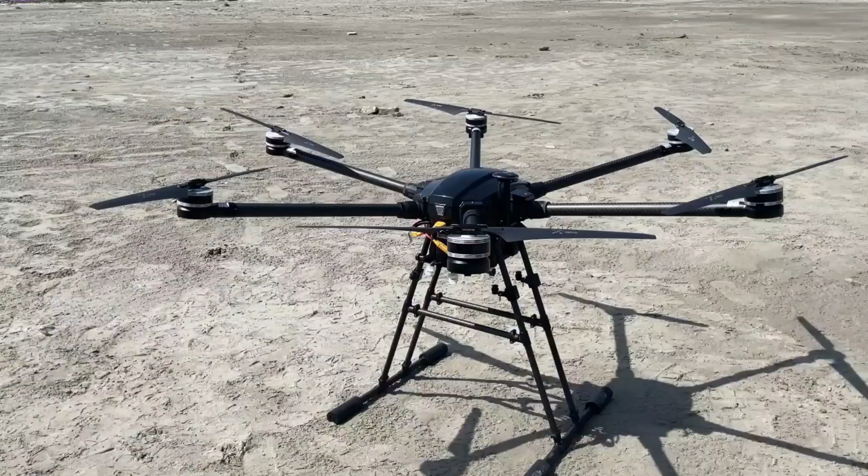Altair is the proposed unmanned aerial vehicle for the 2023 SUAS competition, designed to carry payloads and travel long distances to aid in challenge missions. It can be utilized for a wide range of applications such as aerial mapping, surveying, and rescue missions, as it is equipped with advanced sensors, imaging, and navigation systems.

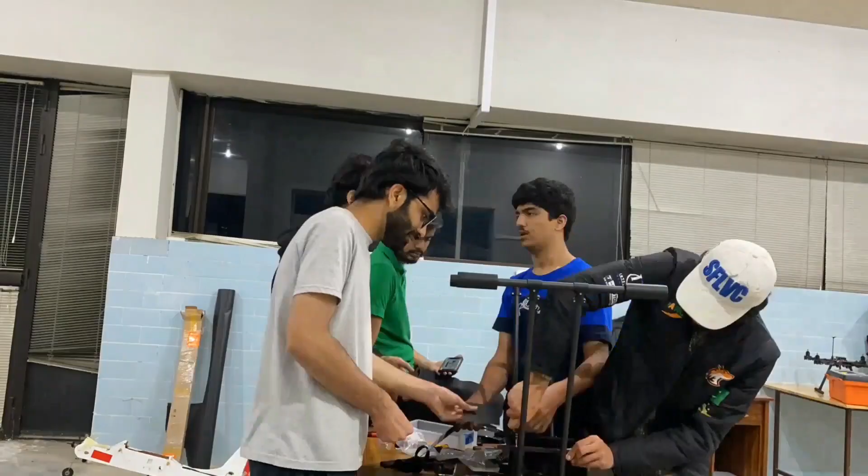The team consists of students from various engineering disciplines and is divided into four main streams: design, product development, software development, and multimedia, who work passionately to unveil the possibilities in aviation every day.

Our competition team includes Muhammad Ali Khwaja, team manager and director of automation, also the safety pilot and point of contact, with 4 years of experience. Waliullah Khan, director of design and test pilot, as well as GCS operator and backup safety pilot, with 4 years of experience.

Umar Arif, product and systems development lead and multimedia lead, 4 years of experience. Zain Mahmood, director of testing and documentation and competition safety and operations lead, 4 years of experience. Hashim Shabir, product development head and competition's electrical systems lead, 3 years of experience.

Moiz Taha, director of finance and design head, as well as GCS operator and electrical systems lead, 3 years of experience. Muhammad Ahmed Adil Khan, design and automation lead and mechanical systems lead, 3 years of experience. Muhammad Danish Javed, digital graphics lead and electrical systems head, as well as multimedia and avionics lead, 3 years of experience.

Abdur Rafe Amir, automation systems head and product assembly lead, 2 years of experience. Abdul Wase, product development head and electrical systems and product assembly lead, 2 years of experience. Muhammad Saad Farooq, mechanical systems lead and avionics lead, 2 years of experience. Umar Irfan, automation head and avionics lead, 2 years of experience.

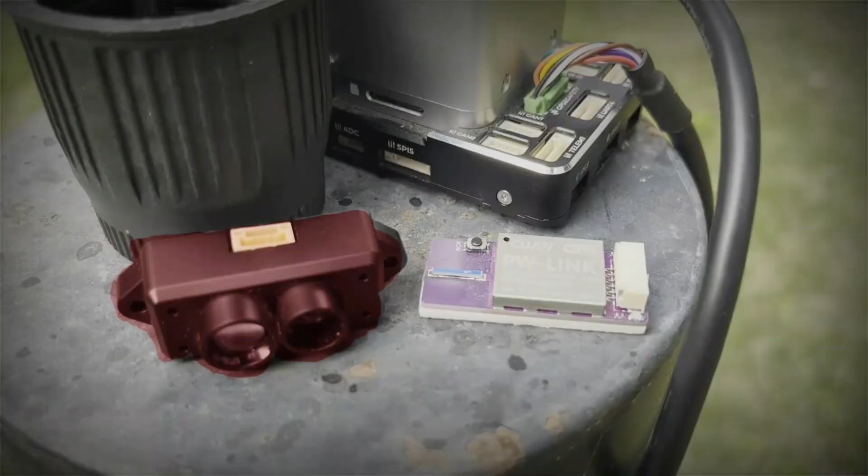LiDARs are used for obstacle avoidance, which will continuously monitor the surroundings to timely perform evasive maneuvers. Electronics and payload are very well secured in place on the UAV to avoid any debris falling off during the mission.

A high-definition 3-axis gimbal is used to make the airdrop as accurate as possible within an allowed 15 feet radius. 20 test flights were performed, and the maximum waypoint deviation was 12 to 15%, which is within the allowed limit.

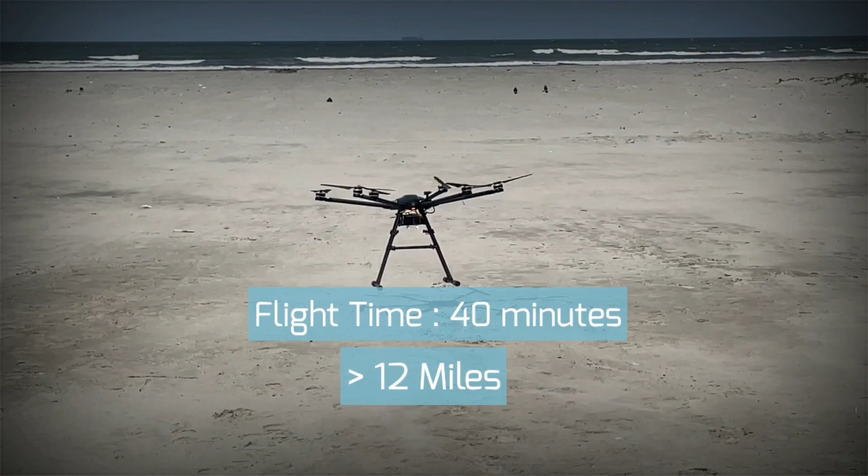Using two 6S 30 amp-hour batteries in series, the drone has a flight time of approximately 40 minutes and can go more than 12 miles on a single flight.

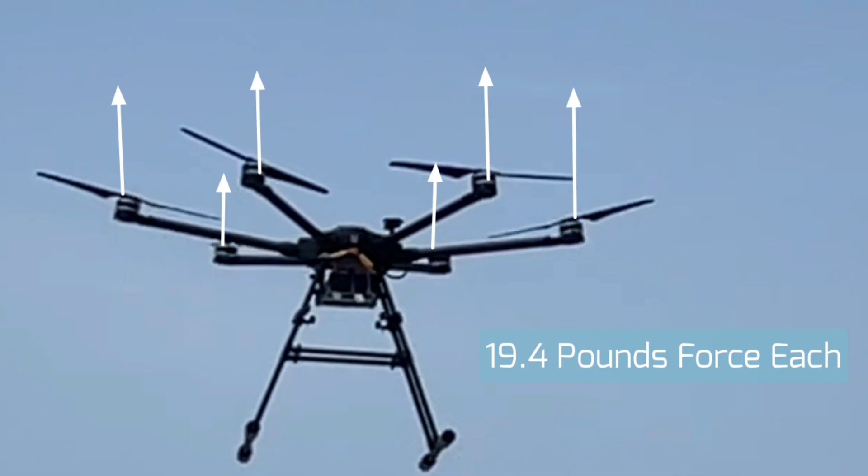113.8 pound force of total motor thrust, approximately 19 pound force each, is enough to carry the UAV to an altitude of at least 75 feet.

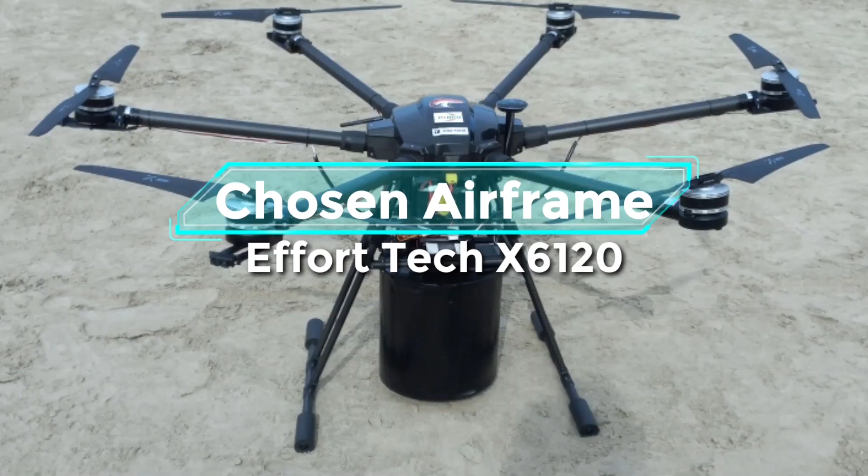Our chosen airframe is a modified Effort Tech X6120, a hexacopter frame with 0.63 inches of carbon fiber tubes used for arms and landing skids. The system utilizes 6 T-motor MN605S 170 kV motors with 22.4 by 8-inch propellers, combined with two 30 amp-hour 6S batteries, which provide a thrust-to-weight ratio of 2.8 and a top speed of 19.44 knots, with a maximum takeoff mass of approximately 40 pounds.

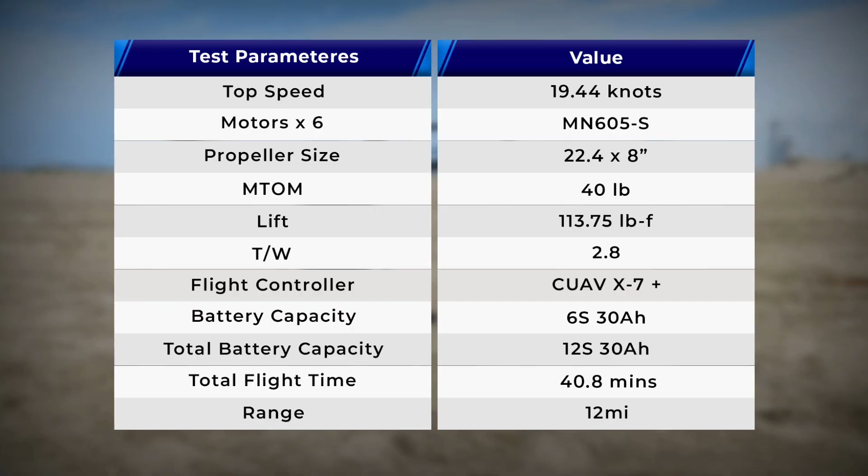For autonomous flight, our system uses a CUAV X7 Plus flight management unit and a Neo 3 GPS module as the positioning system. Mission Planner software is used as the ground station software to monitor required real-time flight parameters, such as battery voltage, airspeed, altitude, satellite count, and heading.

Our communication system is composed of a Taranis QX7 radio and a Holybro telemetry V3 operating at 433 MHz, transmitting data between GCS and autopilot using Mavlink protocol. High-gain antennas are incorporated to increase the telemetry range up to 1.37 miles.

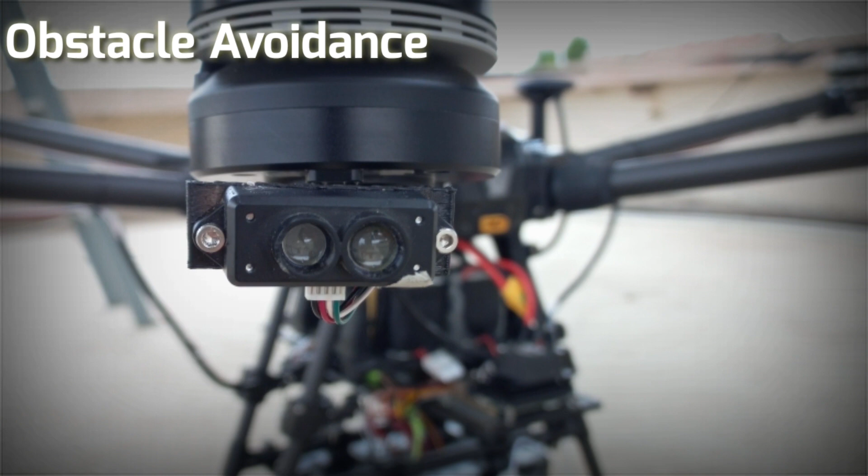For obstacle avoidance, the team uses 6 Benewake TF Mini S LiDARs having a detection range of 39 feet and a field of view of 2 degrees each.

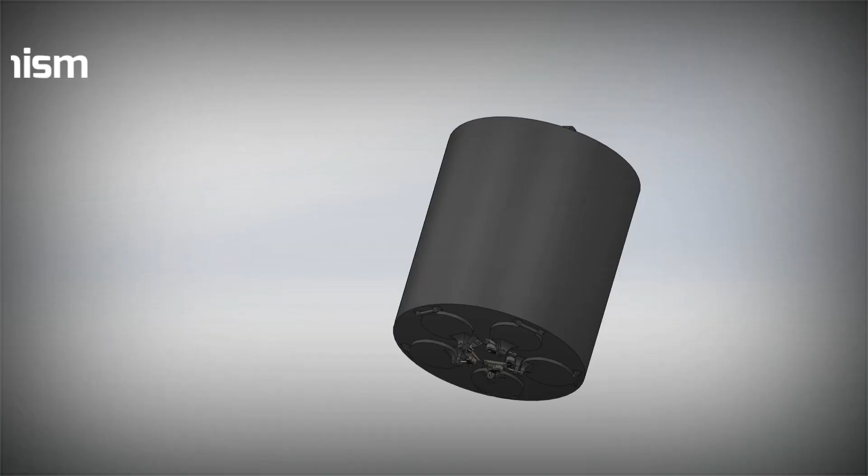Object detection is done through a Tarot 10x Peeper camera mounted on a 3-axis gimbal. The feed is sent to a Jetson Nano being utilized as a companion computer. The custom-designed pin-release payload dropping mechanism has also been 3D printed in-house using PLA filament.

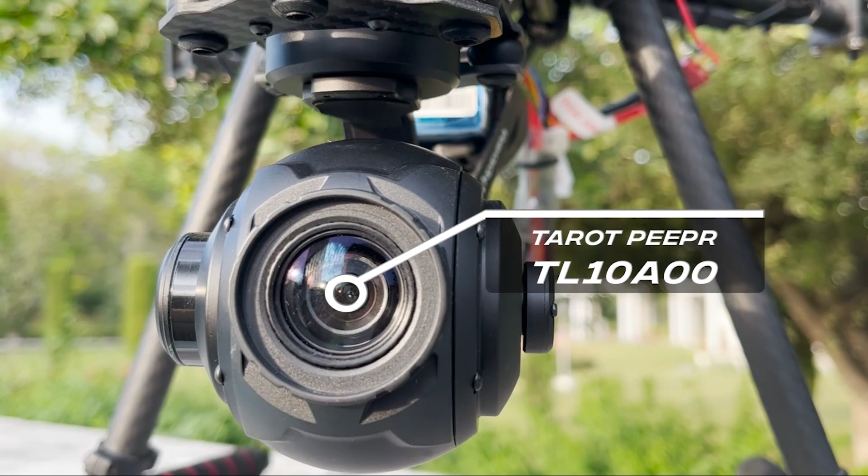Our drone is equipped with a Tarot Peeper TL10A00 camera, which comes with a 3-axis gimbal for stable footage capture and is capable of 10 times optical zoom. It can record videos at 1080p 60 fps, transmitting them through an HDMI 1.4 port to the NVIDIA Jetson Nano for real-time computer vision processing.

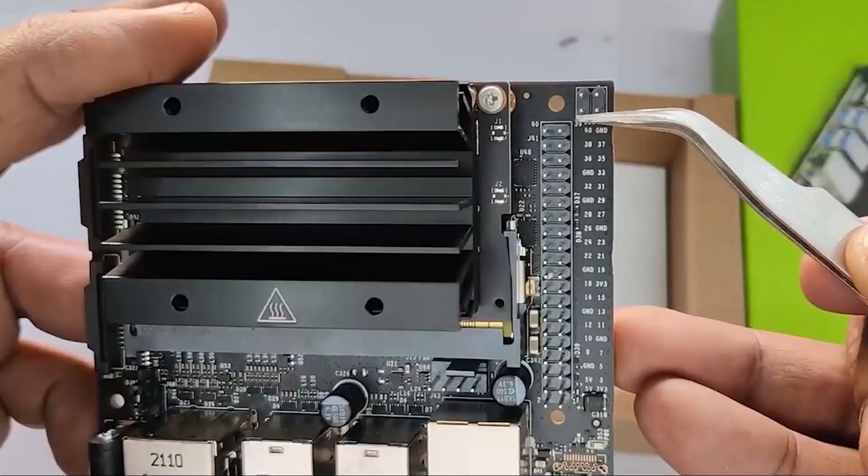Our chosen camera has a focal length between 10 mm and 300 mm, an image sensor of size 4.8 x 3.6 mm, and a video resolution of 1920 x 1080 pixels. An aspect ratio of 16:9 for video means the effective sensor size will be 4.8 x 2.7 mm.

Taking a working distance of 82 feet and maximum focal length, an area of 0.4 x 0.225 on the ground will be covered by our video frame of 1920 x 1080 pixels. Therefore, it is reasonable to say a paper size of 0.216 x 0.279 meters can be easily resolved by our camera.

The YOLO v7 algorithm has been trained to detect colored shapes and emergent objects, while optical character recognition is used to identify letters. Python's DroneKit library helps control the drone's movement and payload mechanism upon detection.

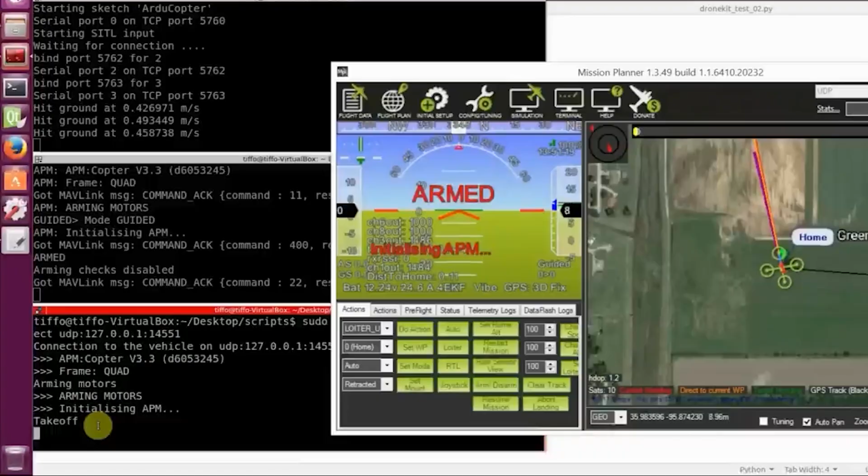Airdrop mechanism consists of a cylindrical body with 5 compartments on the bottom side to house payload bottles with annular parachutes attached to the bottles.

The imaging system identifies the target location, releasing the payload using a servo mechanism that receives a command signal from the companion computer to open the bottom flap by pulling the pin.

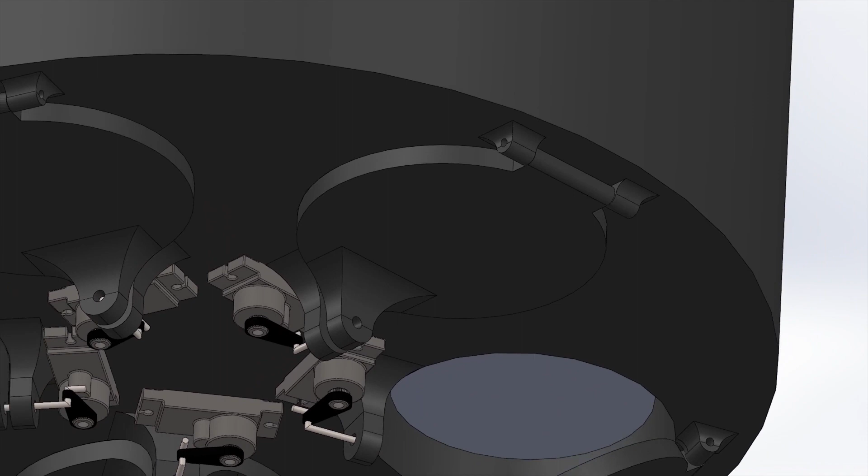After thorough testing, it is confirmed that annular parachutes regulate the landing speed and reduce sway, allowing the bottles to drop within the designated 15-foot radius. Less deviation implies it is safe for humans present in the proximity of the drop zone.

Our UAV system includes Mission Planner as our GCS software for flight path control and real-time data monitoring. We use a 433 MHz HolyBro V3 telemetry system with high-gain antennas for reliable data transmission up to 1.37 miles. The system provides real-time data from the UAV, including airspeed, battery voltage, and other critical flight parameters.

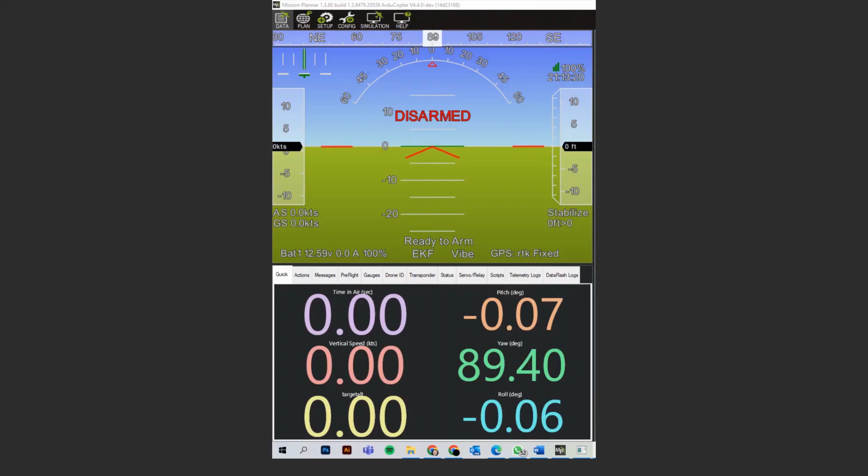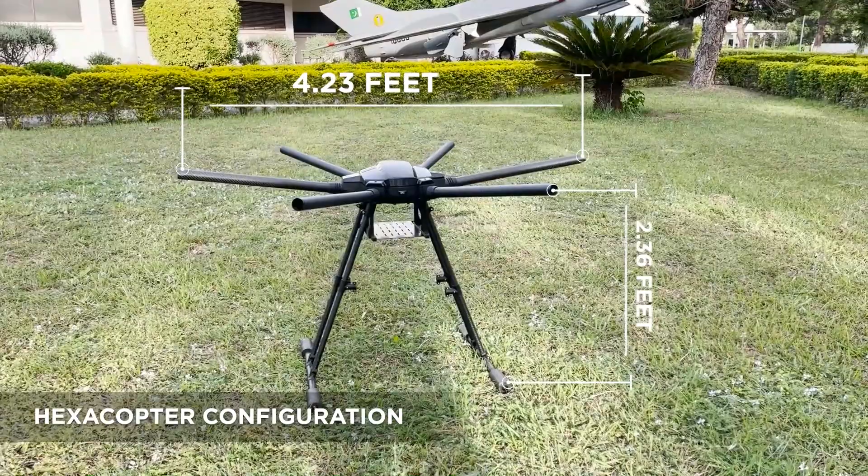Our airframe is a 4.23 feet wide and 2.36 feet tall off-the-shelf product with a hexacopter configuration, having an umbrella folding mechanism for arms. 30mm carbon fiber tubes are used as foldable arms and landing skids, making it a lightweight structure with high strength-to-weight ratio.

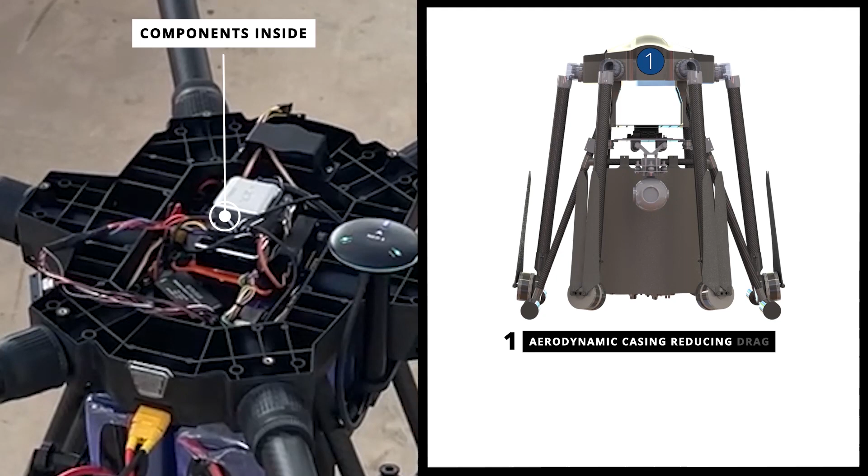The components are covered with an aerodynamic casing to reduce drag and protect electronic components from water and dust. The Jetson Nano plate and payload dropping mechanism have been designed and 3D printed, besides the application of vibration dampeners for a 3-axis gimbal, battery plate, and flight controller.

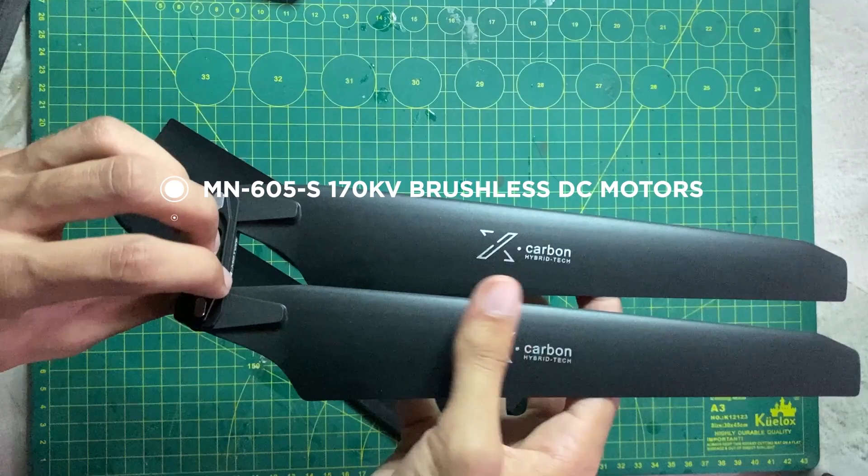The system uses a 605X integrated propulsion system which includes MN605S 170kV brushless DC motors with 22.4 by 8-inch propellers to generate a total lift of 113.8 pound force, giving a thrust-to-weight ratio of 2.8, with a maximum takeoff mass of 40 pounds and a maximum speed of 19.44 knots.

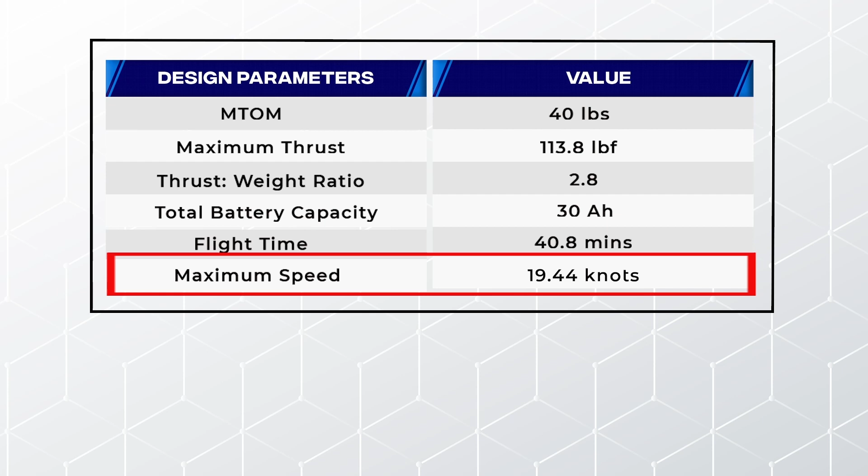A total battery capacity of 12S 30Ah is achieved using two 6S 30Ah lithium-ion batteries to provide a flight time of 40.8 minutes. We are using Alpha 60A HV ESCs with a current draw rating of 60 amps to regulate the speed of the motors. These ESCs store redundant kinetic energy from unpowered rotating motors to charge the battery.

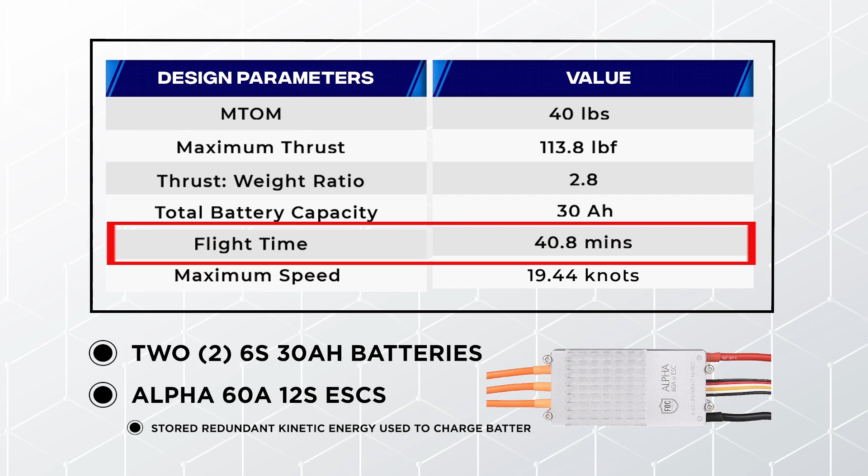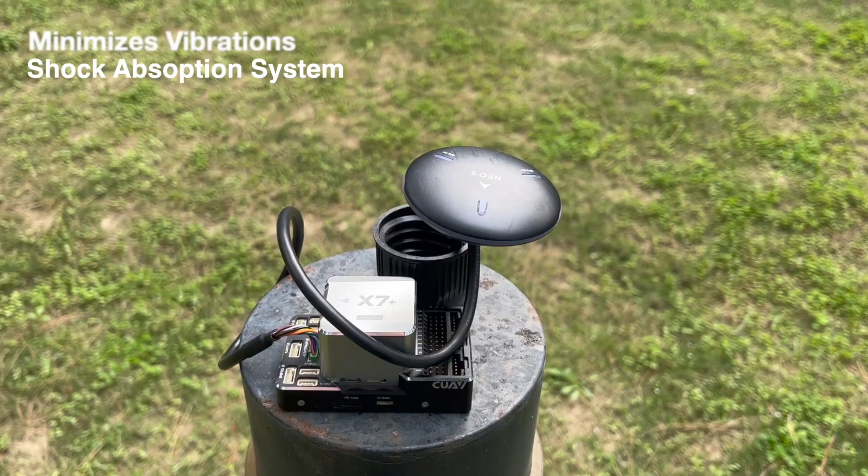The CUAV X7 Plus flight controller has been chosen to give Altair complete autonomy. By minimizing vibrations, the controller's inbuilt shock absorption system enables the drone to absorb shocks and withstand harsh maneuvers during flight. The high-performance processor and onboard sensors make it a capable flight controller.

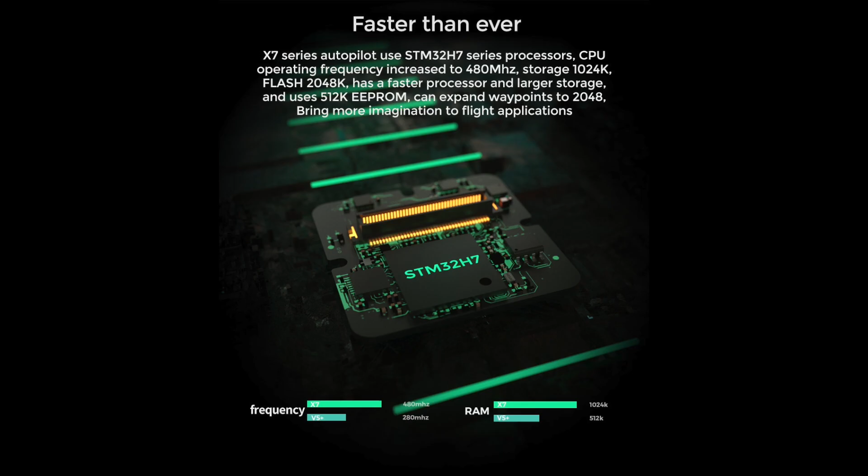The CUAV X7 Plus weighs 101 grams and operates at a wide temperature range of -20 to 80 degrees Celsius. It also has two GPS ports for precise positioning and navigation, besides a power module and battery monitor to ensure optimal battery operation.

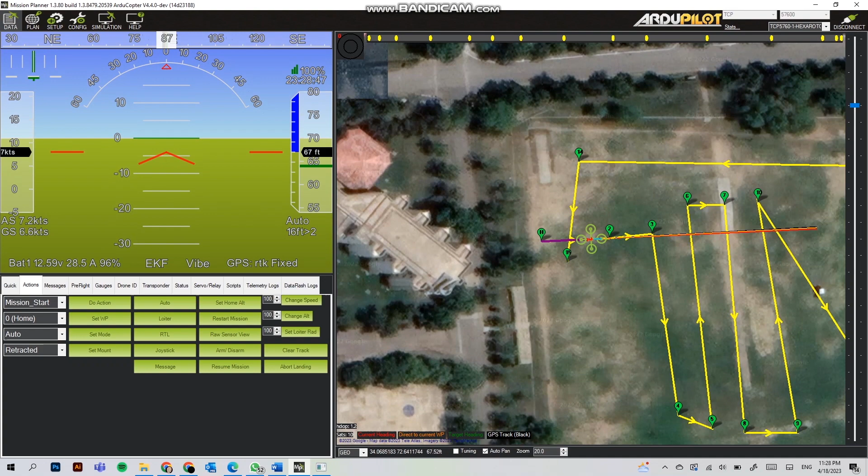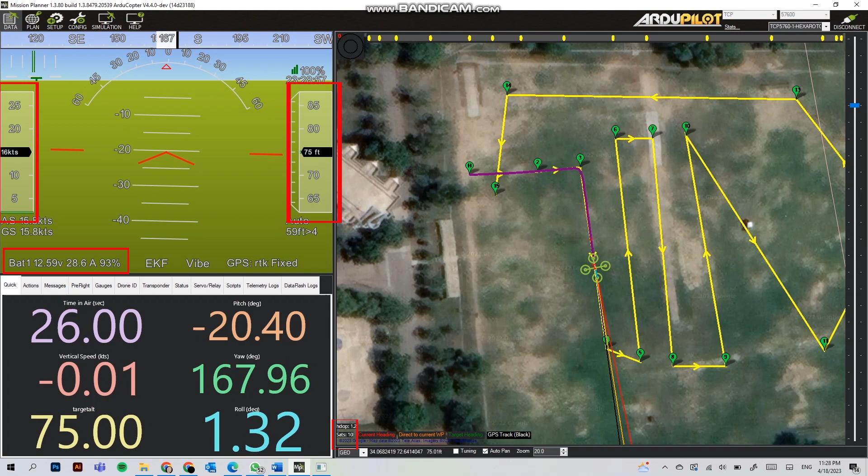We selected Mission Planner as our ground control station software to facilitate autonomous flight path planning. During the flight, Mission Planner records and displays critical flight data such as altitude, airspeed, satellite count, and battery voltage in real time. Additionally, calibration of the GPS, accelerometer, electronic speed controllers, and radio controller is performed within the Mission Planner software at GCS.

6 Benewake TF Mini S LiDARs are positioned on each rod of the hexacopter to minimize blind spots. The LiDARs are connected to the flight controller via the I2C port.

The algorithm used for obstacle avoidance using LiDARs is ArduPilot's built-in Bendy Ruler algorithm. It is not the shortest path algorithm; rather, it simply searches a set distance around the vehicle looking for open spaces and chooses a path to follow based on sufficient open space, while also ensuring that the copter is headed towards the destination.

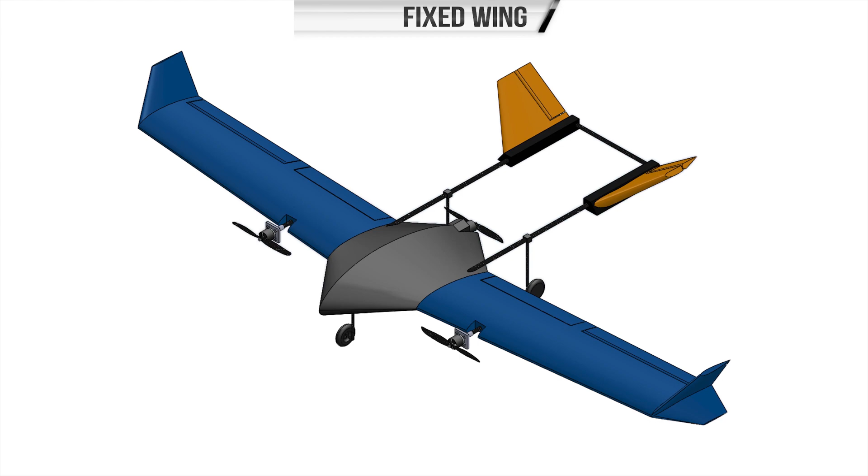During conceptual design, we researched various designs which met our requirements. These included fixed-wing, hybrid, and multi-copter configurations. Fixed wings have longer flight time and range, but they're unsuitable for object detection due to the risks associated with cruising, takeoff, and landing. Hybrids, on the other hand, have limited maneuverability, higher battery consumption, and are unstable during transition in flight.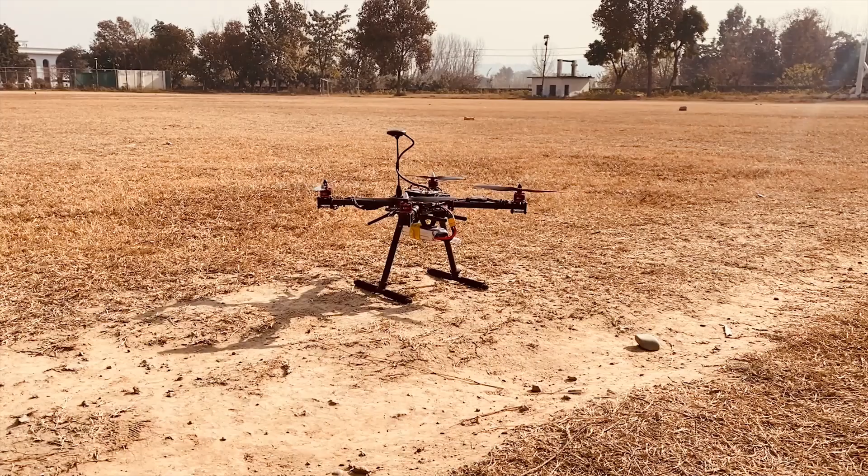The multi-copter configuration is the most suitable, as it can easily navigate through confined spaces for static and dynamic obstacle avoidance. Its lower speeds provide higher accuracy while capturing images and dropping payloads.

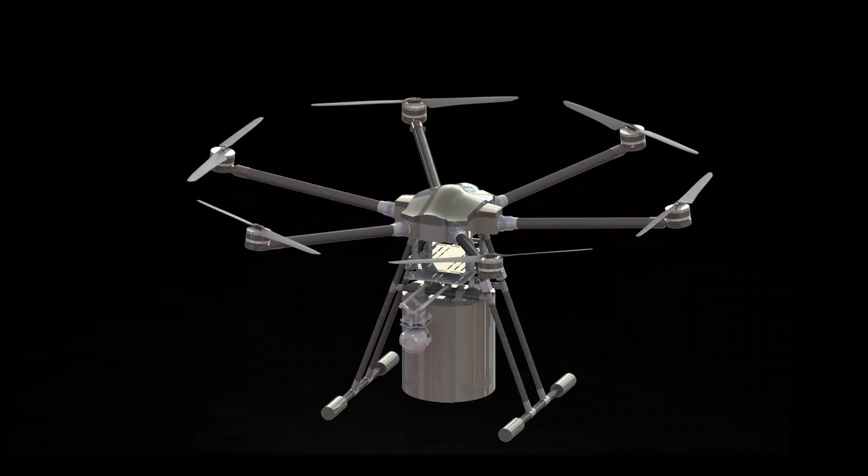So, following a detailed analysis of the mission requirements, a hexacopter was selected as the airframe. It has more payload capacity and better flight stability than a quadcopter, and is less expensive than an octocopter. It can continue flying even if one of its motors fail, as the remaining 5 motors compensate for the loss.

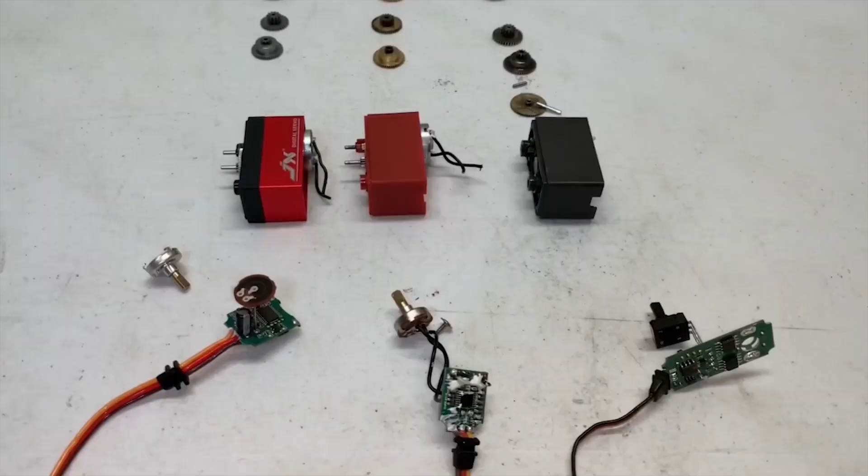We also conceptualized several options for payload drop mechanisms, including pin release, servo winch, and electromagnetic mechanism. The servo and winch mechanism provides precise control over payload delivery, but adds additional weight, complexity, and the potential for mechanical failure. Electromagnets can be very effective, however, they're quite bulky and may interfere with drone electronics.

The pin release servo mechanism was selected as it is flexible and simple to use; it is also cost-effective and can safely carry a variety of payloads. As for the safe and secure landing of our payload, we selected annular parachutes over hexagonal ones, as they're stable with reduced oscillations and less sway, resulting in better accuracy.

A flight termination system has been incorporated with a return to land response after 30 seconds of communications loss.

Wire connections are properly soldered and covered with heat shrinks to prevent short circuits that could lead to a fire.

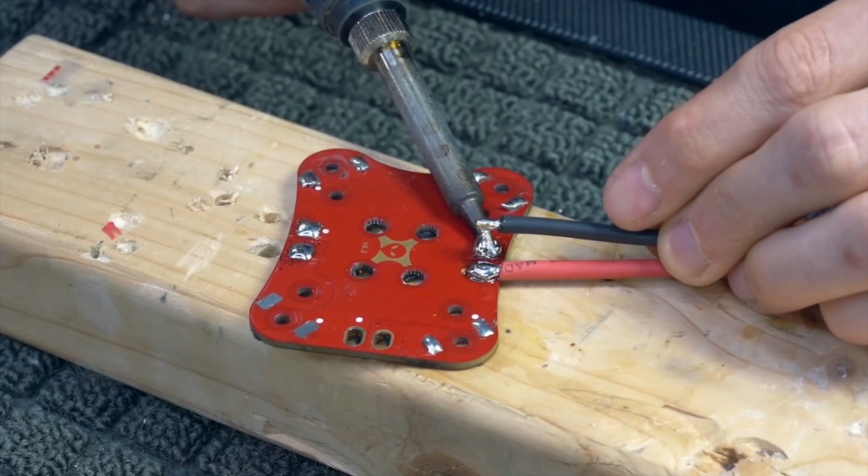Batteries are transported in LiPo bags, and high-quality battery chargers are used to minimize the risks of outbursts, while battery monitors are used to monitor any excessive current draw from batteries and take prompt actions.

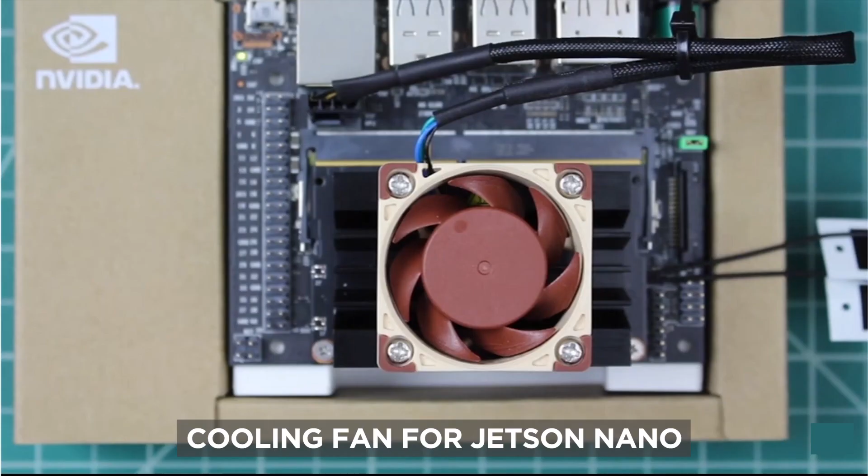Cooling fans with acrylic casing are used to prevent overheating of processing components such as the Jetson Nano.

A safety switch is used to prevent motors from starting by mistake until it is armed using Mission Planner or remote control. Digital servos prevent malfunction and provide the required torque and avoid any slippage.

Nylon insert lock nut fasteners are used. They have blue nylon rings inside them that create friction with the bolts and keep the nuts from coming loose due to vibrations or other movements.

The use of washers in drone assembly allows for load distribution, alignment, and reduction in vibrations.

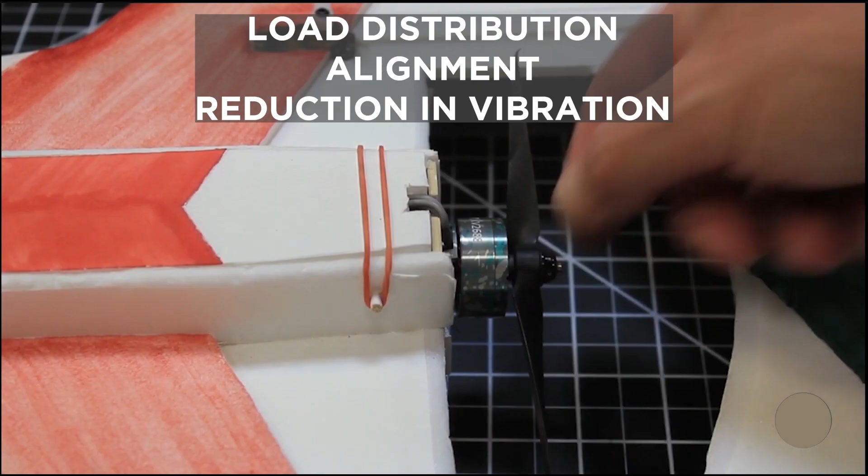The camera was calibrated and extensively tested for reliable imaging. The trained model for ODLC was tested on 500 images and 5 aerial videos both on and off the flight.

It gave an accuracy of 80 to 98% for shapes and colors, 90% for letters, and 80 to 90% for emergent objects, while providing an average object resolution of 120 x 120 pixels in the image.

The steps taken to ensure the best image quality include using an onboard computer for object detection to avoid the delays encountered in streaming data to and from GCS, taking images or recording videos while hovering at very low speeds, and using 5 to 10% of overlap during area search for better results.

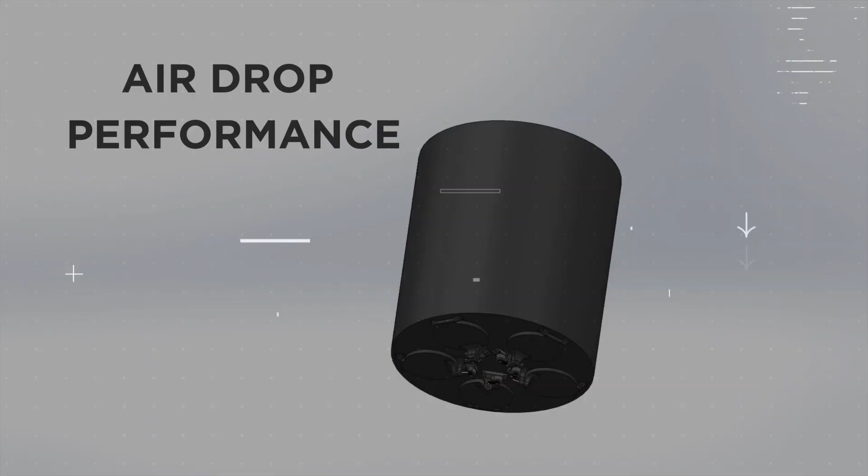Rigorous airdrop testing via manual and autonomous flight modes was done from height ranges of 75 to 100 feet to optimize the annular shape of the parachute in a way that increased the efficiency of the drop location and decreased the touchdown velocity. The optimization decreased the error rate from 50% to 20%.

The payload drop test was performed 25 times, out of which 22 were a success. The average distance of bottles from the center of the 15-foot radius was 5 feet, while the maximum distance was 8 feet.

Our unmanned aerial system uses a telemetry system with a bandwidth of 1.7 MHz, allowing us to transmit and receive data efficiently. The system has a bitrate of 921,600 bits per second, which enables us to transfer large amounts of data quickly. However, there is an expected packet loss of less than 2%.

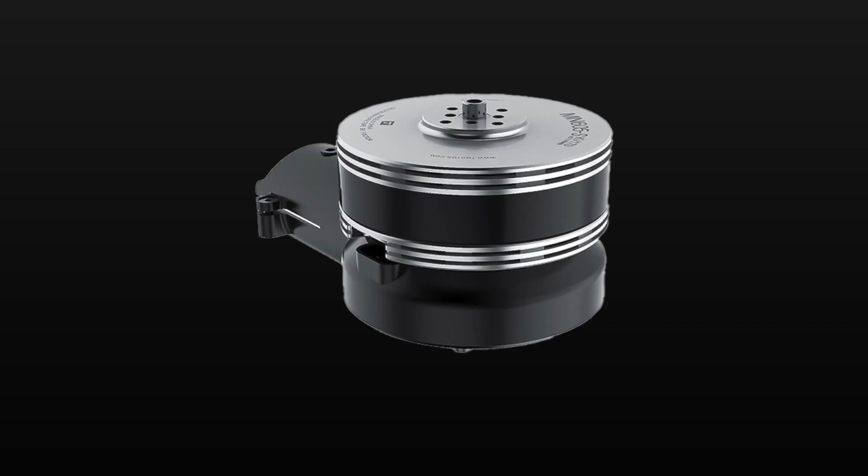15 full 12-mile test flights were conducted to assess aircraft performance. Motor thrust tests showed a total lift capacity of 110 pound-force. PID values were adjusted to maximize waypoint accuracy.

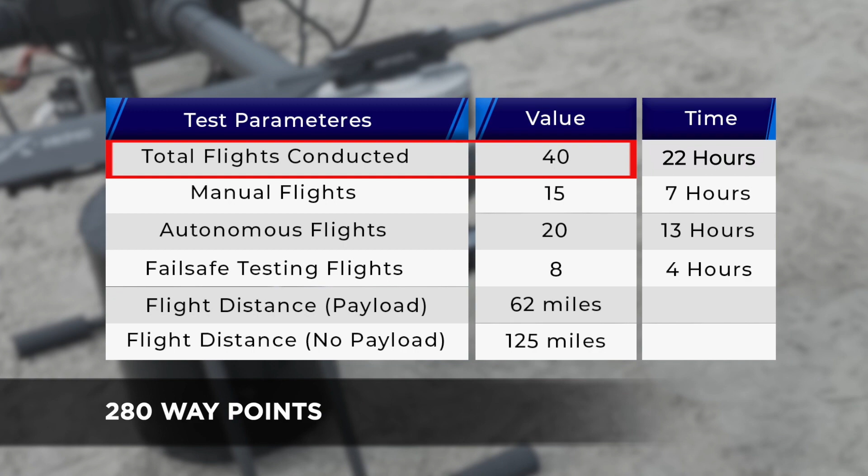40 test flights over 22 hours covered 280 waypoints with a recorded maximum deviation of 4 feet. A geofence was set up to prevent the UAV from crossing mission flight boundary or flying above 400 feet. Tests conducted showed an above 85% success rate for both cases.

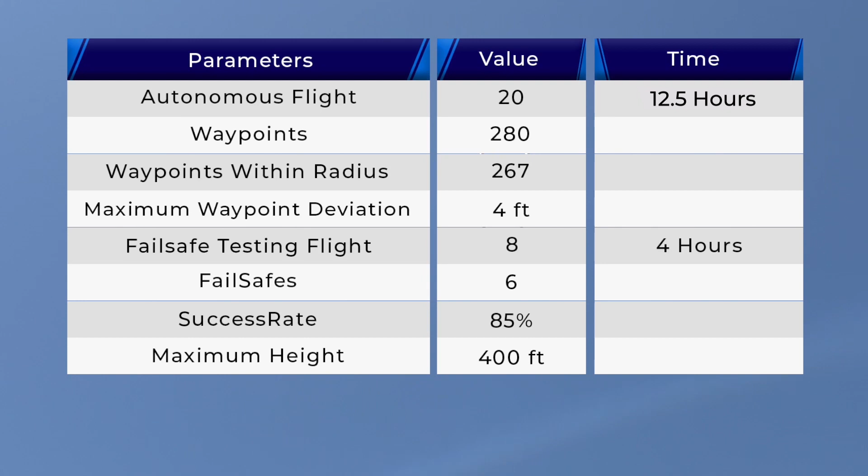The flight path was generated accordingly after testing the waypoint accuracy with 280 waypoints for 12.5 hours over 20 flights. The flight was also rigorously tested after the implementation of the obstacle avoidance program.

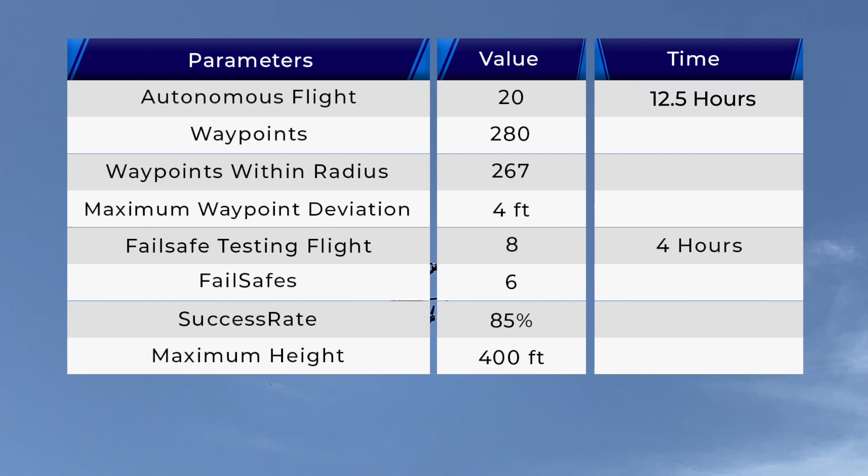6 fail-safes were set up and tested in 8 flights over 4 hours to ensure their proper working. Percentage of their success is shown in the table, maintaining a minimum height of 80 feet.

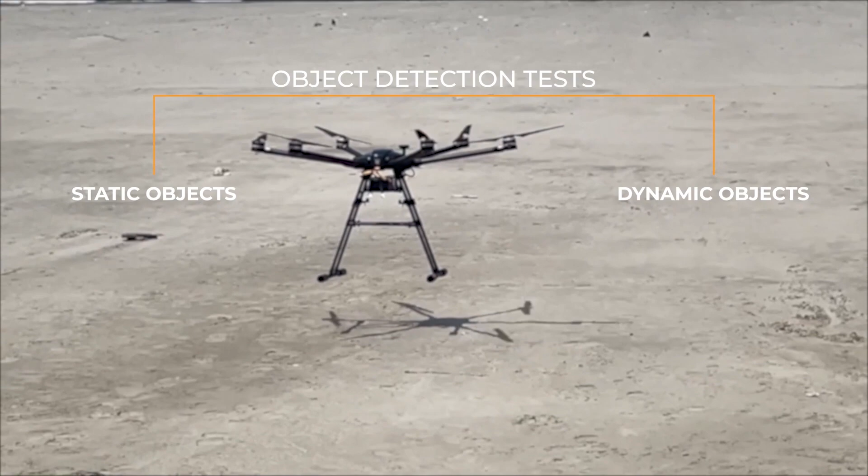Obstacle avoidance was tested in 2 parts, on static objects and dynamic objects. Static obstacle testing was done initially using virtual objects in Mission Planner. Later, testing was conducted on real objects.

Out of 20 tests, 16 were successful. Moreover, our drone avoided most of the dynamic obstacles. Out of 45 obstacles, it avoided 38 obstacles.

The team completed 15 full missions, with all subsystems integrated into Altair to test imaging and ODLC, airdrop, communications, aircraft, and obstacle avoidance systems. Inefficient areas in the systems were fixed.

10 objects were placed over an area of 194,000 square feet for searching. Across 15 flights, the team achieved 70% accuracy in object identification.

The payload landed safely within 15 feet of the target area around 90% of the time. Timeline scored an average of 100%, with 15 minutes to set up, 30 minutes for the mission, and 10 minutes for teardown.

Altair flew over 280 waypoints with an accuracy of 95% and avoided 85% of the obstacles successfully. With 100% in the timeline, 70% in the imaging and ODLC task, 90% in the airdrop task, 85% in obstacle avoidance, and 100% in autonomous flight, the team got a total average score of 89%.

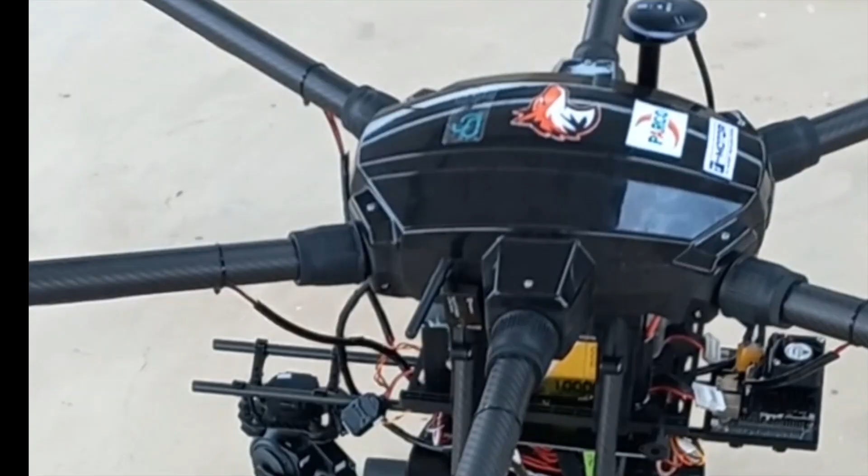In conclusion, Altair has proven to be capable of performing all the required tasks with decent confidence levels. It can fly more than 12 miles on a single charge with the payload, can detect ground markers with 70% confidence.

And can avoid mid-air collision with 85% using its LiDAR systems. We're excited about the competitions and we believe it will perform well in all domains.